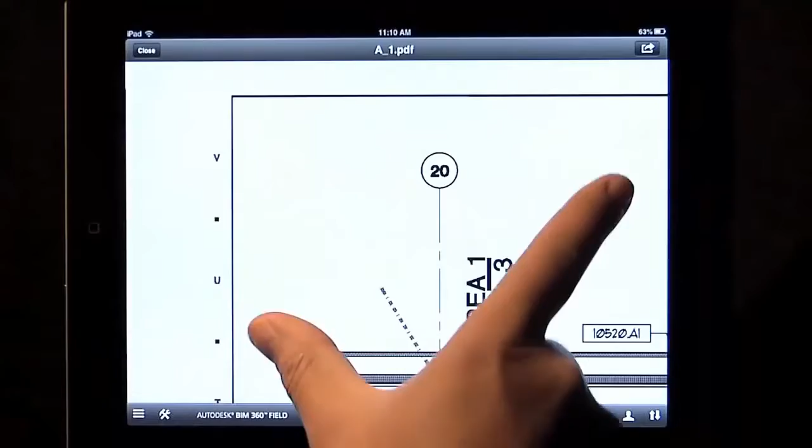An important feature of using BIM 360 Field is that you synchronize with the database and choose just the files you want or need in the field. This helps provide you with the right versions of the data at the right time. We can pan and zoom around this document as needed very quickly and efficiently.

Note that the BIM 360 Field website is the place that hosts all the data, but on the iPad, you can have contextual information. This means that you only need to have the data you care about for a specific action, activity, day, or set of tasks you are working on, making the system faster and more efficient for your needs now.

Next, we will complete a quality inspection and start with a set of templates for quality control checklists. These are either pulled from your company's master library, imported from Microsoft Excel, or you can leverage our built-in content. The point is that they can be configured by your project team and can be specific to the project, or in this case, specific tasks like above the ceiling close-in.

We simply work our way down the list, picking yes, no, true, false, pass, fail, or however the checklist is configured for this specific activity. You may also notice the little icon here above the issue button, the blue eye. The blue eye is how the project team can provide information to the inspector about what the installation should look like so they can confirm whether the observation is in or out of conformance.

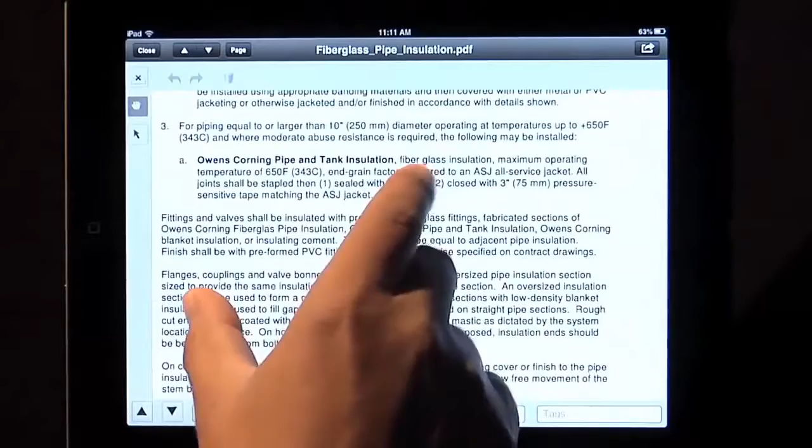A specification, a photo of what conforming install looks like, other supporting documents, they all can be attached to the checklist item to enable easy access to valuable inspection data. Here we can see the specification for the pipe insulation displayed, denoting how the insulation is supposed to be installed. Having this data at the inspector's fingertips helps the project team establish a standard of conformance for this and all observations moving forward.

Whenever we mark an item as non-conforming, it creates an issue in the database. The issue will have a unique ID number, a type for follow-up and for reporting, a company it's assigned to, a status, and so on. All the fields are configured to have the information we need for our inspection, tracking, and reporting.

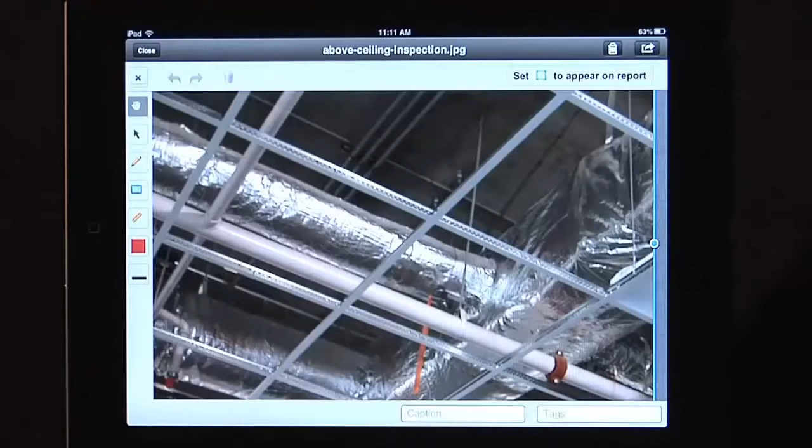The description for the issue is pre-populated with the text we need already, but we can also add comments and notes as needed. We then add attachments to these issues, where we are given the choice to use the built-in camera on the iPad or attach a file or plan from the library. We can mark up that photo by drawing and highlighting details about the issue, tap out a caption, add text, whatever we need to communicate the issue details.

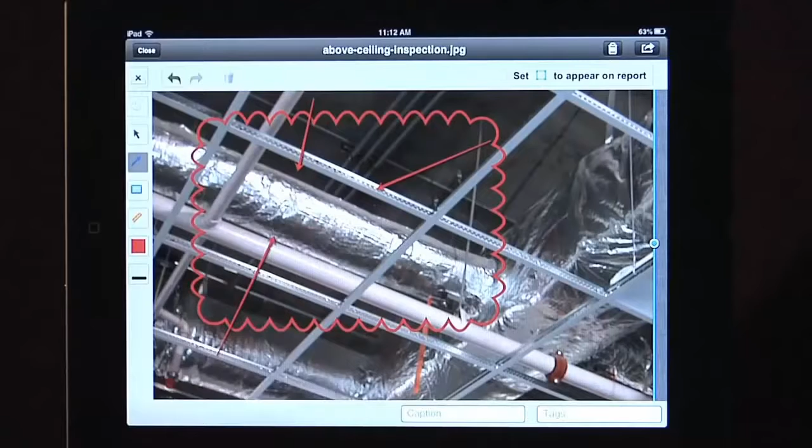We can also attach PDFs, before and after photos, or however many documents we need to more accurately and effectively communicate the issue. We can also view a list of issues, just like if we had a notebook and pen to track items that need to be followed up on. We see the other issues that were created, but can simply click the plus sign and add another one as needed.

This list view is also great for reviewing items that have been completed or need reinspection, where we can simply tap a new status for an issue and see other information about them by simply selecting them from the list.

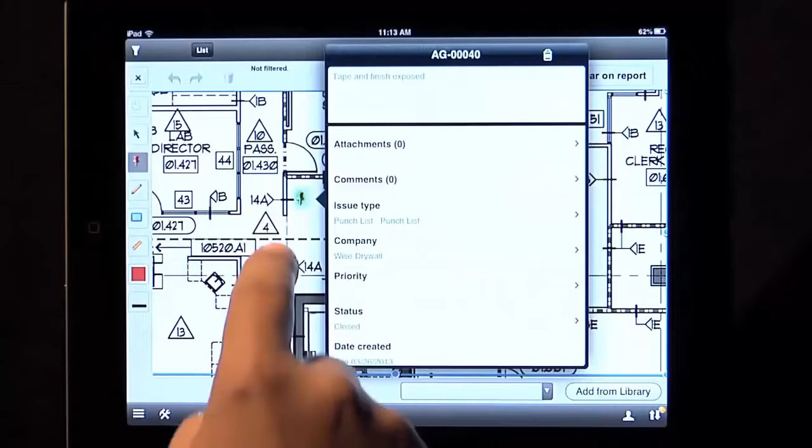Another way to capture issues in the field is to add push pins to drawings. This is the equivalent to taking a paper drawing out in the field and making notes and markups on the paper where we find issues. Here, we take the digital plan, browse to the area in question, again panning and zooming as needed, and drop push pins on the area of the issue.

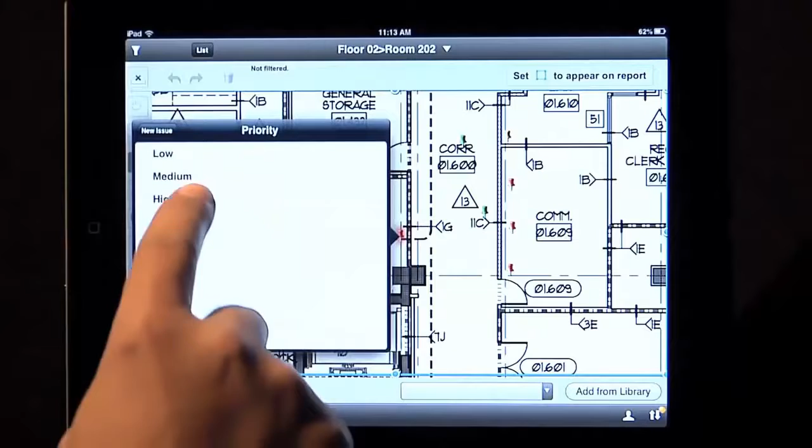We simply repeat the process for all the issues we find in the location. By using the Issue Template button, we create multiple issues by just touching a finger to the screen. It's fast and easy, and each one is able to be tracked separately. This is the same as adding issues from a checklist like we did previously, and because we are using the issue templates, we have all the same configurable fields the project team has put in place.

Let's now take a look at tracking the installation and startup of equipment using BIM 360 Field. Here we see the equipment view on the iPad. We have all the fields your project team can configure for the equipment with details about the individual pieces as well as field information that can and will be collected during the commissioning process.

We can also view checklists, issues, attachments such as operating manuals, specifications, and any other documents or information you need attached to the equipment to reference in the field. The important takeaway here is that the field personnel can get all the information they need.

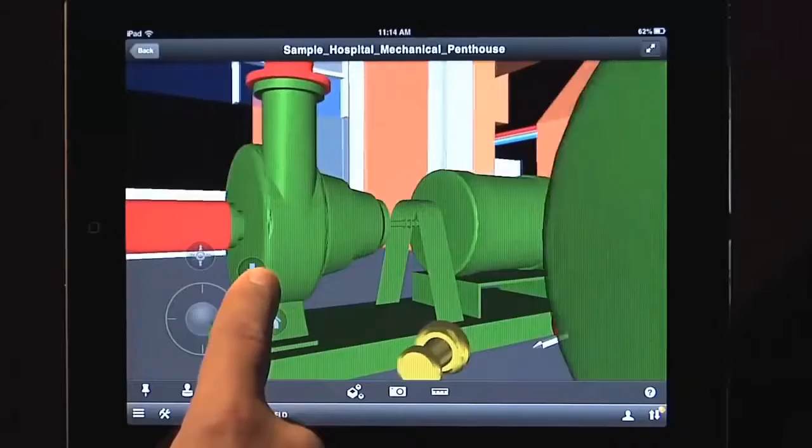Lastly, we note that we can also view the equipment in a model. This is where we extend the field management capabilities further with the use of Building Information Models, or BIM. Here is the Building Information Model coming from Autodesk Navisworks Simulate or Manage, downloaded to the iPad where we can pan, zoom, walk, and view the model however we need. The pump we were working with is highlighted in the mechanical room of our project.

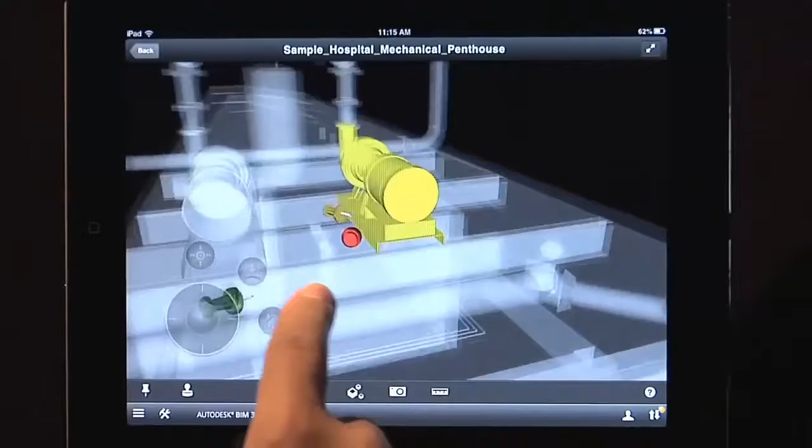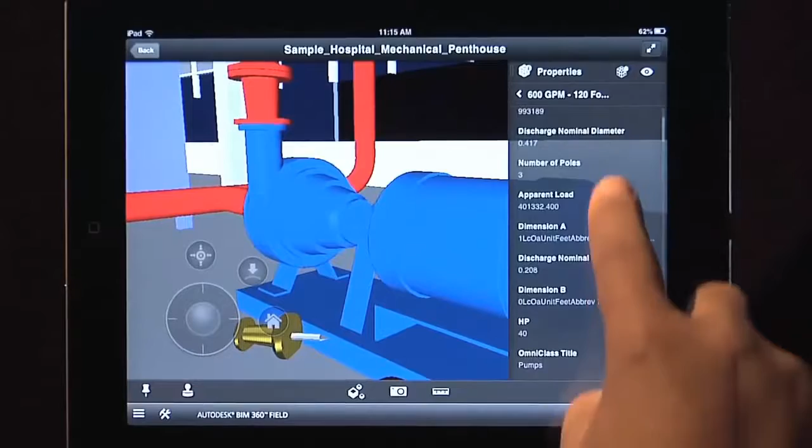We use intuitive gestures to move around the model. We can quickly hide or display model elements to better see the information for the task at hand, with the full information model available to interact with. While exploring the model here on the iPad, we can also make observations with push pins, just like we had with a plan before.

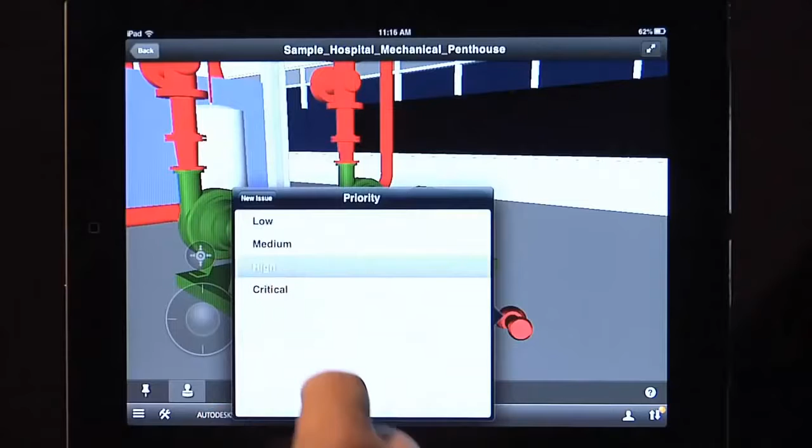Let's say that while inspecting the pump, we notice a crack in the floor near the base. We again use the issue templates and can easily add a push pin in the model, denoting the issue and add the appropriate details to the issue.

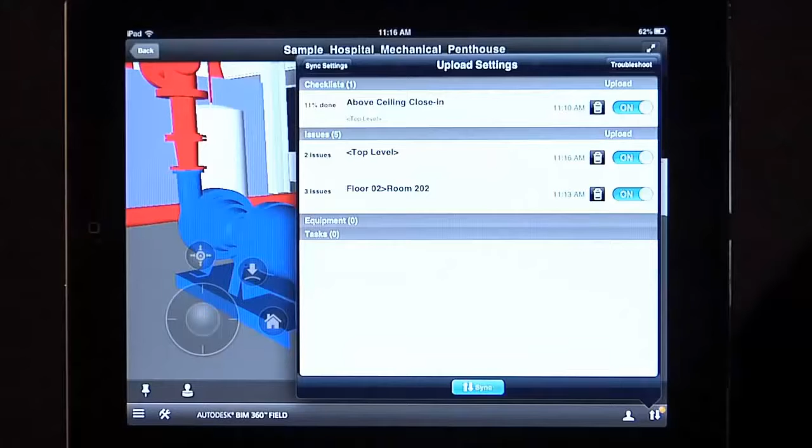Once I have the list of all the issues found, as well as the checklist we've worked on, we simply return to the job site trailer or somewhere there is an internet connection and synchronize the information to the project database. Once uploaded, the information collected will be available for reports to be run and the entire project team to see. At the same time we upload, we also download any new or updated information from the project that is needed, such as new documents, updated checklists, or other issues that we may want to backcheck in the field for follow-up.

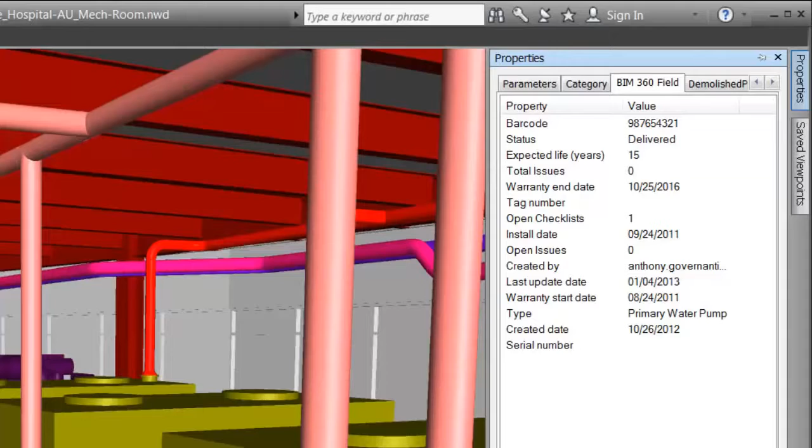Let's now take a look at how this valuable field information can be leveraged by other project stakeholders back in the office. Here we see the model in an Autodesk Navisworks software product and see that there is a tab added to its properties specific to BIM 360 Field. Having this information inside our Building Information Model extends the intelligent data that is coming from the field into our other construction activities and helps to integrate the workflows between office and field from pre-construction planning through coordination, construction, commissioning,

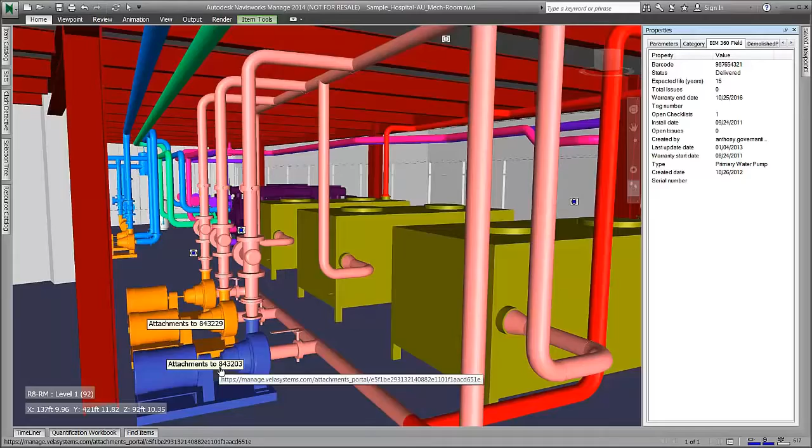and eventually handover. We have the same live links to the attachments from BIM 360 Field here in the model as well, like operation manuals or specifications. We can also use that field information to visually impact our model, as seen here with an appearance change for the pumps that have been fully installed, been received, or have had startup tests done.

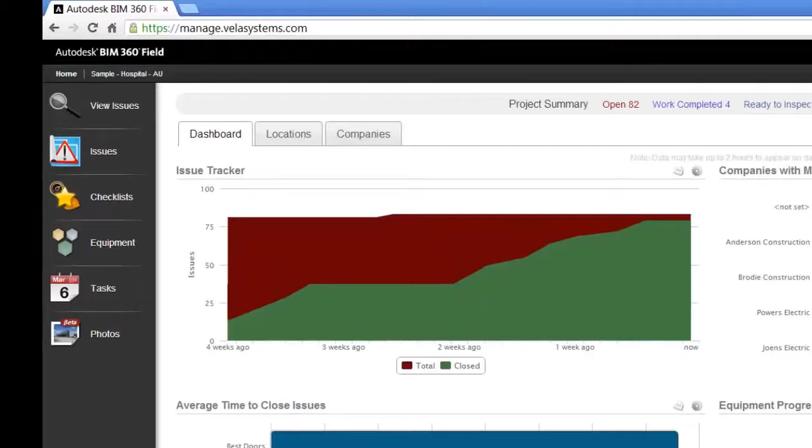Finally, let's go over the BIM 360 Field website, where all the information that is coming from the field management activities on the iPad can be viewed, organized, and reported on. We have project-specific dashboards that are defined by the individual user to show the data and analysis they need most often. We view the issues for the project, see all of the issues project-wide, but also use filters to get just the data we need quickly.

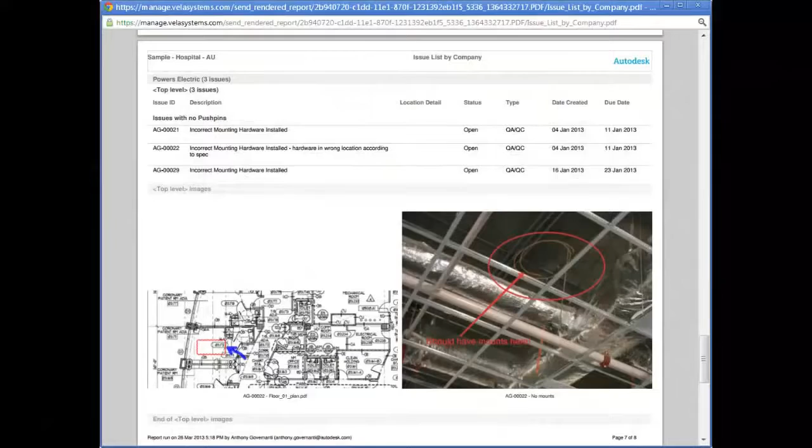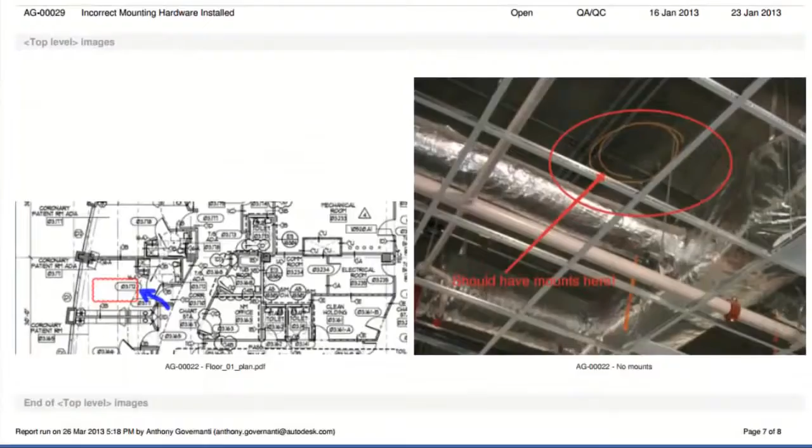We have an easy-to-use and navigate interface where we can view the lists and then at any time dig into the details quickly. We also have reports that can be run showing push pins for issues, all sorted as we need them. In this report, things are grouped by subcontractor, color-coded by status, and include any attachments, photos, and markups associated with the items being reported.

Let's review some of the value of using a field management process with Autodesk BIM 360 Field for your infrastructure and building projects today. First, you have an opportunity to win more business by demonstrating your ability to take advantage of the revolution in mobility in construction and bring owners more accurate and timely information about their project from the field. You can improve profitability by helping to accelerate project schedules through increased efficiency in the field and minimize profit-eating rework by implementing quality and safety management programs.

And lastly, you can drive higher conformance across all areas of execution by leveraging quality and safety reports and dashboards, as well as conducting ongoing assessments of subcontractors, projects, and teams with timely and more accurate construction data.